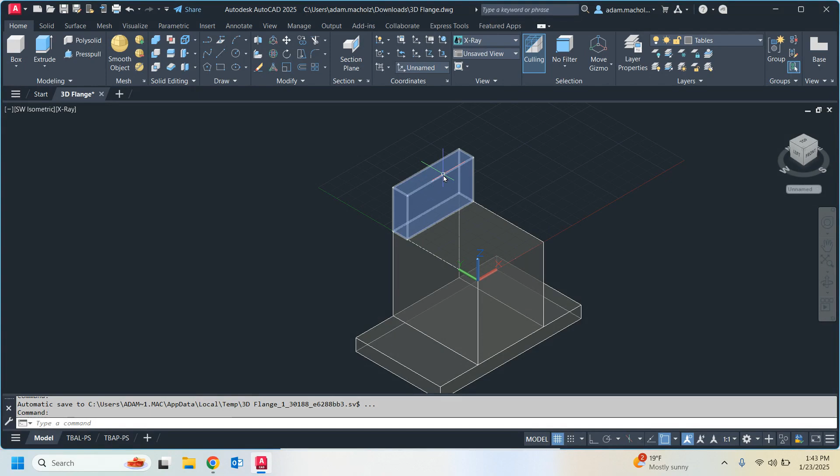So we see that depth is 3/8. We need an overall width of 1 9/16. So that tells me that this little bit is bumped out a little bit from the back too. So now I need to do a little bit more math, because I don't think 3/8 is my y now that I see that. If I'm starting at the back of what I already have, that would be right here. From the front of this all the way to the back is going to be 1 9/16.

Okay. So what do I already have? I already have 3/4. So to find out how much extra I need, I'm going to take my 1 9/16, and I need to subtract 3/4. I know that it's easy to make 3/4 into 16ths. I know that it's not possible to make 16ths into fourths unless I'm dealing with 4/16, 8/16, and so on. So let's not worry about that.

Let's take 3/4. So 3/4 is equal to 6/8. 6/8 is equal to 12/16. All I did is multiply the top and bottom of each fraction, numerator and denominator, by 2, and then I did it again until I got the denominator that I wanted to have. So now I'm taking 1 9/16 minus 12/16. In this sort of situation, I borrow.

I'm sorry that you can't see the math that I'm doing. I suppose I could pull up Paint here. That might be a good option for those visual people. So I've got 1 9/16.

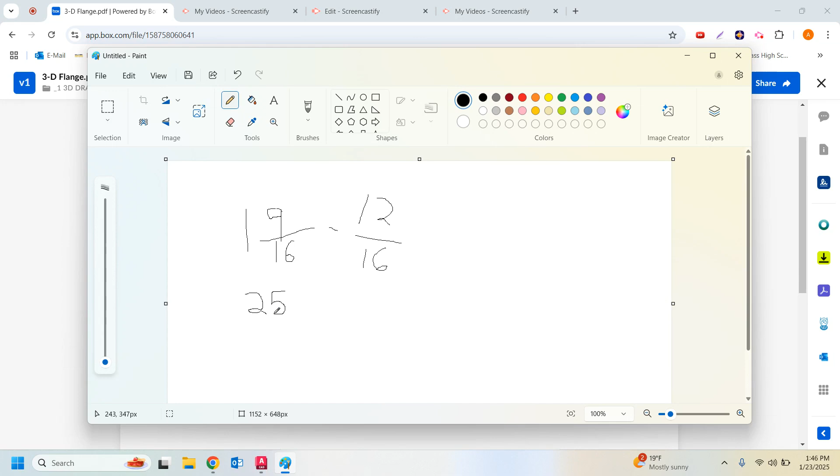Okay, minus 12/16. So what I do in this situation is I borrow, right? But how do you do that? Because it's a fraction. Well, I borrow the equivalent of 1. So a number equal to 1 that has 16 in it. So I have 16/16 plus 9/16. So 16 plus 9 is going to be 25. I don't add denominators.

25/16. Oh, we can't have that, math teachers say. No, we can't, but we're still working with this number because it's easier to understand this way, and it's still equal to the correct number. So take 25/16 minus 12/16. We do not subtract denominators. We only subtract the top. So that's going to be 25 minus 12, should be 13.

13/16. Okay. So that's the amount I need to go back from the back. I already went 3/4. I need to go 13/16. If I don't know how to type that in as a decimal, I go to my calculator. I do 13 divided by 16. We could do that on Microsoft Paint too, but I like you too much to do that to you.

So we're going to take that number. That number is 0.8125. Just give me a cursor that can actually give me a dot of significance. Oh, I don't want to mess with that stuff right now. We'll go 8125. Sure, those look kind of like numbers. We'll go with it. Okay, so that is my y. So let's see. So I'm at 3.5 by 0.8125.

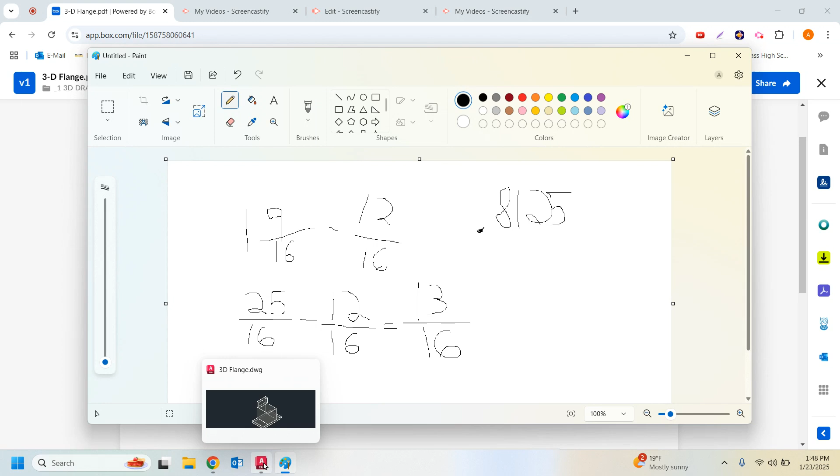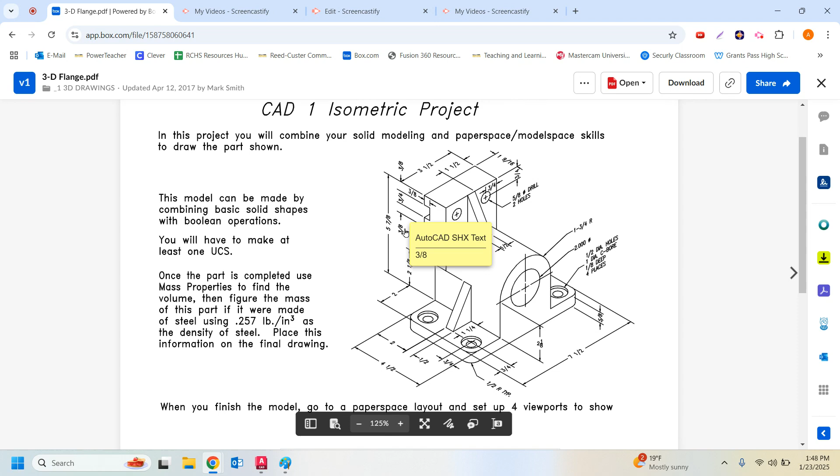And my overall height, I think with the shape it's easier to do one big one of these. So let's look at our height again. Get out of here, Microsoft Paint. Okay, so now I've got 3/8, 3/8, and 3/4 to add to be my total height. Okay, 3/8 plus 3/8, 6/8. That's equal to 3/4, because 3/4, if you multiply it by 2/2, is 6/8.

So can you do 3/4 plus 3/4? You should end up with 1.5 inches. So if I start at the top of this, it'll be a negative 1.5. Now, it was kind of a long time just to get that measurement, and that's going to happen sometimes in design. When I design things for the real world that I'm going to print, especially if it matters how big it is, I sit there with a dial caliper, and I measure stuff out with the caliper.

If I'm not sure, I'll measure a thing that I want to reference it to see if it's the right size. So there's a lot of math involved in design, and it gets to be fun when you actually care about getting the right answer. That's what I like about design, is I do actually end up caring. Okay, let's do a box. For this one, I want to see behind the shape, so I'm going to look at it from a northwest isometric. Would you look at that?

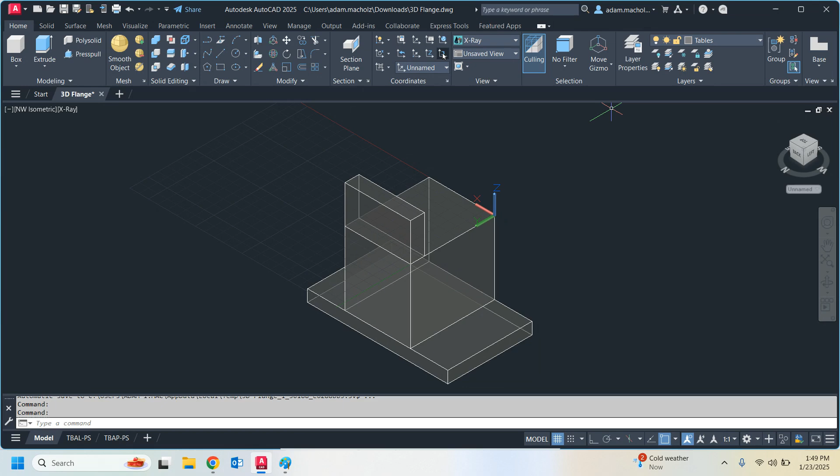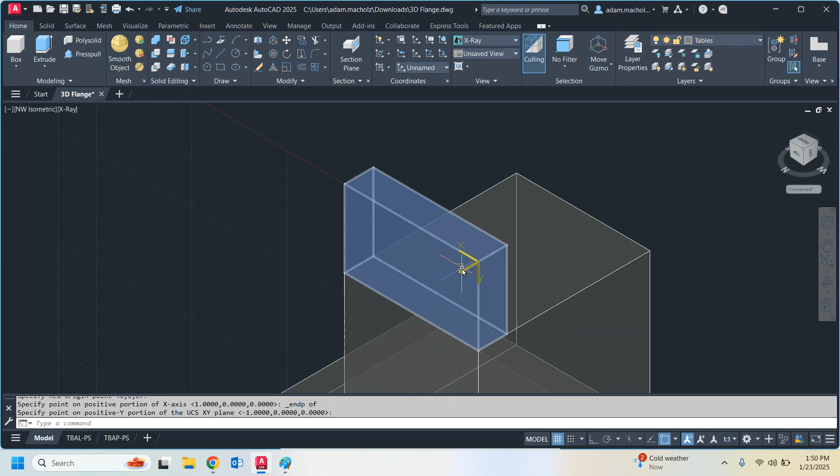I'm going to define my plane with 3 points. I'm going to go 1. I have X going up this way. Why don't you grab that corner, X? I'm going to shift right click, go to end point. There we go. And then I'm going to go right here to this end point. Now my work plane is on this surface. Okay. So, one thing to point out, my Z is coming out this way. My Y looks like it's going that way. I don't really like that.

X, Y, Z. Let's tip it that way. They're calling that a northwest isometric, so I've got X going that way, Y going that way, Z going that way. I guess that is what I set myself up for. So I'm gonna work with it. Okay, so that just means my Z and my Y need to flip in what order they are. That's okay. So I'm doing a box. I'm going from here, and the opposite corner is gonna meet up with that one. So the length of it, let's just go with the opposite corner.

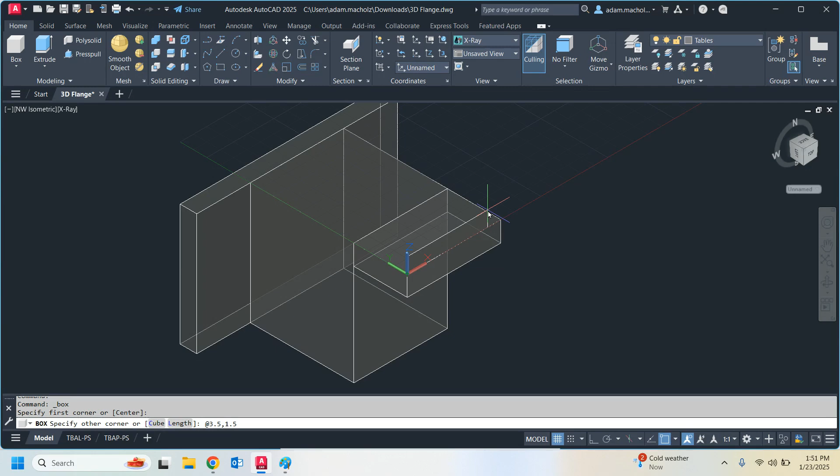The X is gonna be at 3.5. So I want to go up that way, 3.5. And the Y coordinate is going to be, where's my number there? My negative 1.5. It's actually going to be a positive 1.5 just because of how this shook out. 1.5. Let's put it there and see. It didn't like that. That's Z. That's Z, AutoCAD. All right, we'll try again.

Box. Let's choose right here. We're going at 3.5, comma, 1.5. Okay. That time it took it. Who knows? And now I'm going to go up 0.8125. All right.

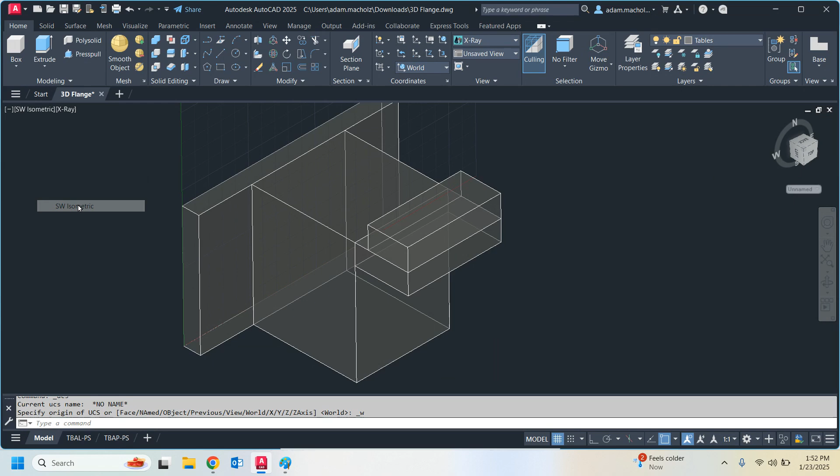Let's take a look at our world coordinate system. Sometimes using the view cube, I could click this corner. Sometimes that's fine, but sometimes it's just easier. I want southwest isometric. I'm going to go there. Okay. I'm starting to see. It looks like a washing machine. So the next thing I need to do is cut out that little bit here for that little groove in the back.

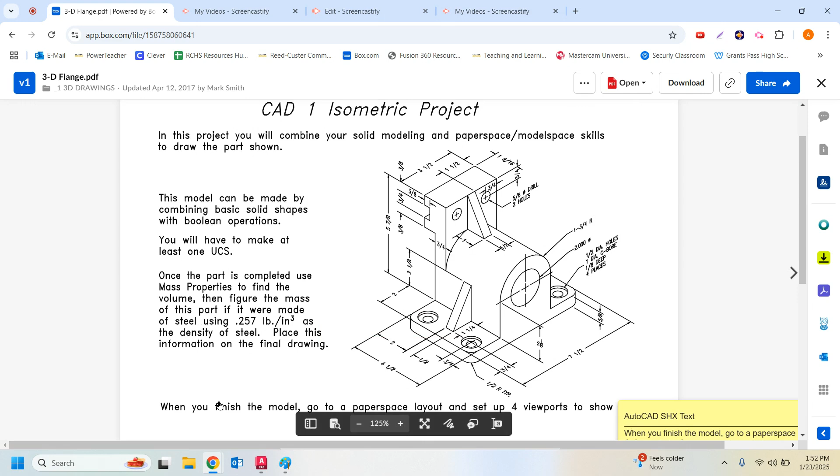So that groove we know is down 3/8 from here. We also know that it is 3/4 of an inch this way, and it's 3/8 of an inch this way. So 3/8 and 3/4 are the numbers I'm going to work with. 3/8, 3/4. Okay, I may need to come back and look back at that. We will see here. Okay, let's go to AutoCAD. Let's go back to our northwest isometric.